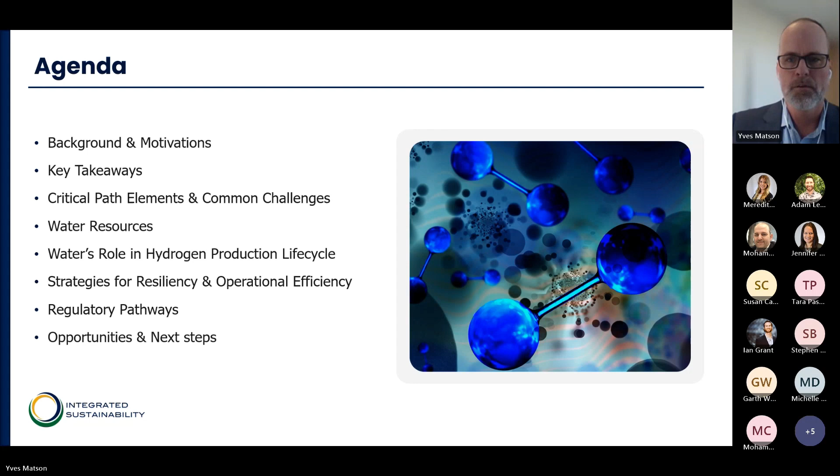This slide is here - if anyone in the room doesn't believe that hydrogen is going to be part of the mix, I'd be surprised. The question is, how big is hydrogen going to be? How fast is it going to come? We all believe in this room that you either decarbonize before you burn it or you decarbonize after you burn it, and hydrogen will play a role in the former.

What will be the barriers to hydrogen projects in Canada moving forward is the big question. Obviously, financing is in the room and regulatory considerations are in the room, but we also believe water is in the room in terms of what will cause different projects to be more competitive, different projects to get more pushback as they move through their cycles, and also which projects potentially get public pushback in terms of their footprint and what their benefits are.

I'm flashing these key takeaways here to kind of frame the webinar. I'll be displaying this at the end as well. The key takeaway is water is a trickier critical path element than a lot of the projects we've been interacting with believe.

Most of the hydrogen projects I've chatted with say, well, we'll deal with that when we get to FEED, we'll do process optimization when we get to FEED. Our opinion is that it should be in FEED. Before you go to the regulator, before you get that final investment decision wrapped up, water needs to be something that is squared away. This is true of a lot of industrial projects, not just hydrogen, but certainly in the oil and gas sector and the mining sector - water is now a very, very critical path.

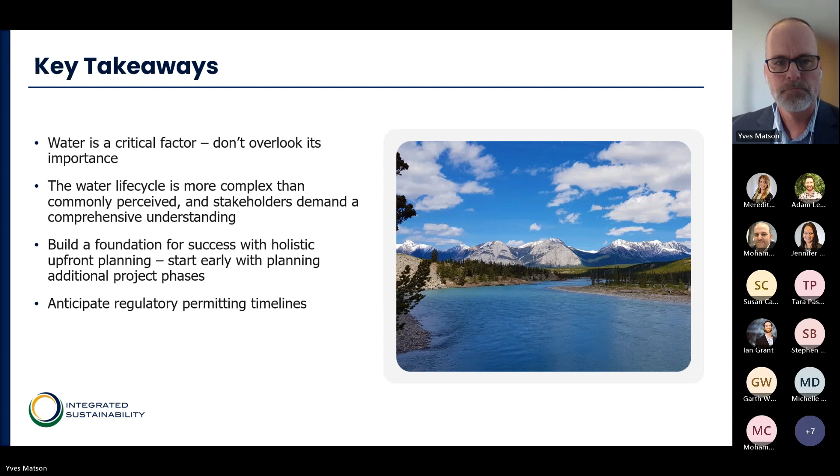So these are the 5 buckets that we really want to speak to today. Water sourcing is going to be something you're probably already thinking about - yes, I do have water nearby, or I've got an ocean nearby, or whatever the case is. You're thinking, my vendor has said I need X amount of water at X spec to go into my process, and that's certainly true. There are some options around water treatment for purity - certainly it's probably a reverse osmosis or RO discussion. But RO is itself a little complex in terms of what we call reject water.

So not all the water you put into the front comes into your process. How many passes through the RO do you push that reject water? What kind of wastewater does it generate in the back end?

Water cooling strategies is a bucket here that I think a lot of people don't pay much attention to in the early process development stage of hydrogen projects. At least that's what I've found. So the water cooling strategies are definitely not at the forefront.

But they consume a lot more water than the process. And so can we make those other less potable, less high quality waters work? The wastewater management side is also somewhat passed over.

If you have ample disposal for an RO reject or a blowdown water from your cooling towers, then you're probably in a good position. But if you don't, because geologically you are on the shield, or you don't have access to disposal because the aquifers are already over pressured by, say, oil and gas activities, then you'll have to come up with other options to deal with it.

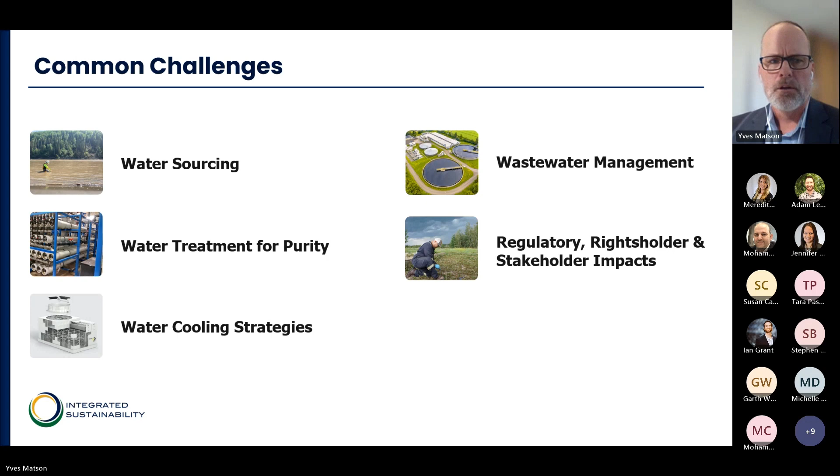The surface water use in Canada is not equal in terms of its geography. There are places in Canada, denoted by the red, where water is already very stressed. In Alberta, for instance, there are a lot of closed basins where no new licenses are being permitted.

There is the ability to buy those licenses. The challenge is, how close are they to your operations? How available are they? What volume do they have? How reliable are they? So even if you have a license, licenses can get shut down if there is a drought condition.

And you guys are going to have these facilities here for 20, 25, maybe 35 years. And inside those decades, there will be drought conditions. So having understood that, hey, I've got water nearby, is kind of step A. Step B is what happens if that gets turned off? How do I come up with plan B and maybe even plan C?

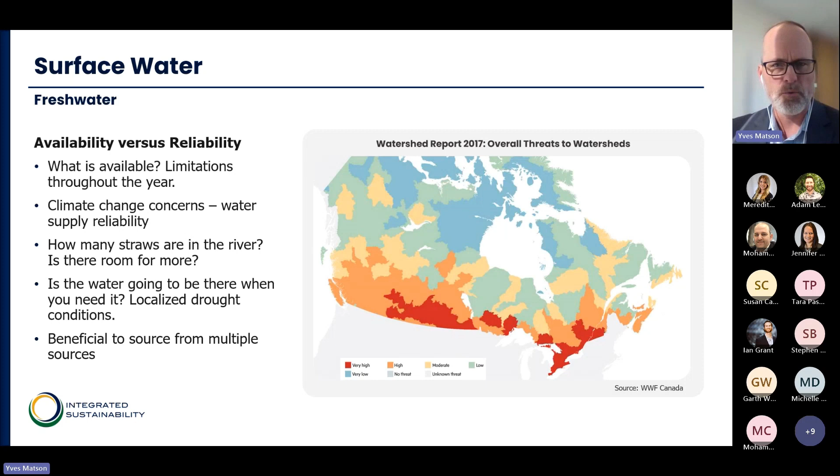And can I reach into alternate sources in times of need? And what are those? And how can I store them? And what volume are they at?

So one of the things that we have recommended to clients in a host of different industries is, what is your storage need? So you might have ample surface water during a portion of the year, but if the freshet falls off and those water resources fall off with it, or in a drought condition, it's only available during a certain portion of the year.

Surface storage may be a way to buffer those shortages. Building large reservoirs is an understood and well-established process that many different industries pursue. Hydrogen will likely need to have this as somewhat of a backup. And it can also potentially play into some of the cooling strategies, although it depends on what kind of water you're using and putting into there.

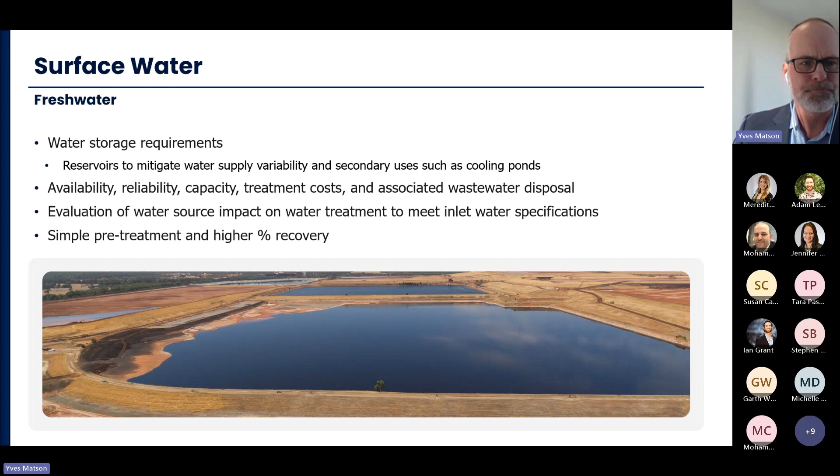The North Saskatchewan is a good case study, probably for a few of the projects in the room here, because there are a lot of steam methane reformation projects progressing in the industrial heartland. Some new studies have found more water in that basin, and it is deemed that there is sufficient water for a project or two projects.

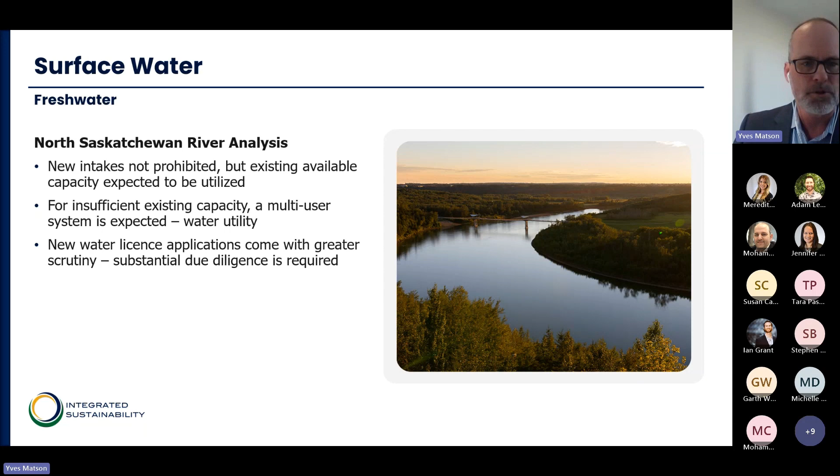The question is, there's about 4 or 5 trying to progress. And so is there room for 4 or 5 projects? That's a big question. Probably not. And certainly which project moves forward will probably be one that uses less water and has less pushback in that respect. This is the hydrological curve of the North Saskatchewan.

So this is that peak and ebb that I talked about that may require that storage capacity to get through drought conditions and or much lower flow periods.

One thing that the North Sask will very likely require is analysis of alternative sources. So there are lots of municipal effluents. There's lots of other places for stuff like saline groundwater to enter into the equation. And before they allow a big new straw and huge withdrawals, they will want that analysis done. Is that feasible or not?

It's not to say that it will be absolutely required. Quite often in instances, you can demonstrate that it's just not feasible to do that, and that's accepted, but you will have to do that analysis.

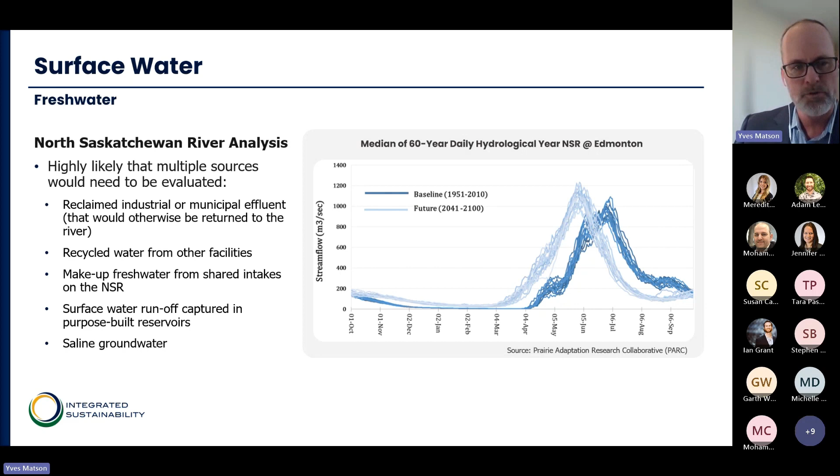The other side of it is there is very likely to be a multi-user aspect to that resource. So you won't be able to simply say, well, my project needs a new straw in the river and I need this much water. You'll have to band together in a utility intake on that river.

We also get questions about seawater from our customers, predominantly in the Maritimes of Canada. They would like to know, what's the impact? There's obviously abundant seawater for their project ad infinitum, so what's the impact of seawater on use?

The answer is it's very doable, but it adds a lot of cost, as you might expect. A lot of the projects are saying, can I use seawater for cooling requirements only? And the answer is yes, but it does add cost.

So by far the cheapest is surface potable water at scale. It's where that's not available, or the socioeconomic, social feedback, or pushback from regulators and stakeholders pushes projects to look for alternatives to freshwater and potentially bring in seawater.

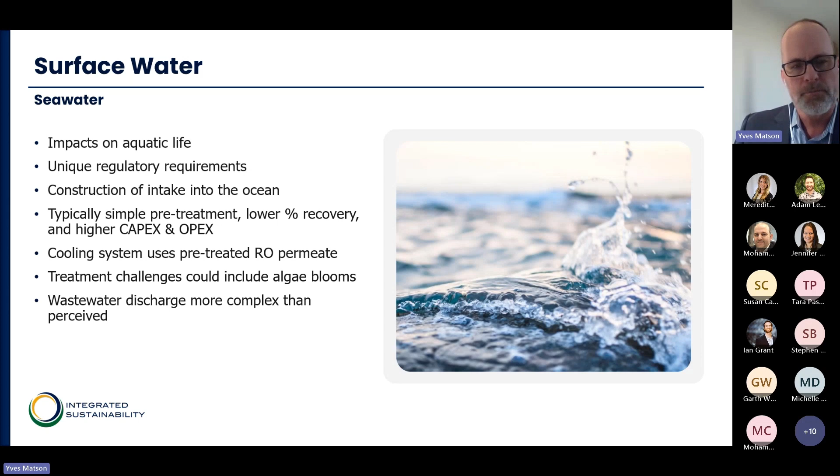There are issues in terms of biologicals and sometimes algae blooms. These are things other desalination projects have encountered around the world. But the good news is it's very well understood.

Groundwater is another question. There are strained groundwater aquifers, and there are groundwater aquifers that have high volumes available. The reaction to using fresh groundwater is pretty similar to the reaction to using fresh surface water. It's a precious resource that's being used for agriculture in cities and towns.

Saline groundwater is another question, very similar to seawater. It varies enormously in salinity depending on how deep it is and the aquifers. It can range from slightly saline, 10,000 TDS, all the way up to extremely salty, 3, 4, 5 times more salty than seawater even. But the management of it is very similar.

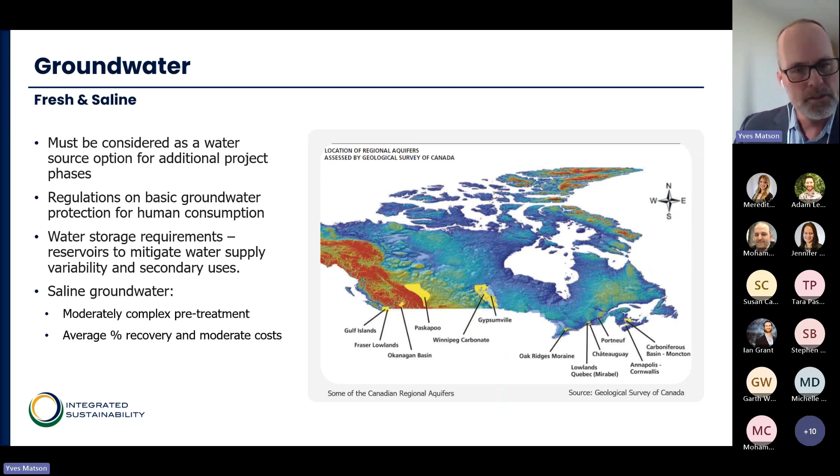So the kinds of materials required, the complexity of treatment - it is unlikely that you would want to use this for your ultra-demineralized pure water feedstock for your process, but quite likely that you might turn to it for the much higher volumes needed for cooling.

I spoke a bit about effluent before. Integrated actually has some experience moving, for instance, pulp and paper effluent - millions and millions of cubic meters per year of effluent getting discharged back into a river that's considered engineered water, which could be moved to a hydrogen project and used quite feasibly with a little bit of pre-treatment for things like biologicals.

One of the issues in the room when using something like industrial effluent is that it's very likely that the plant will have shutdowns or turnarounds to do maintenance. So what is the risk mitigation around that? They may have an emergency shutdown if something goes wrong in terms of part of their process. So storing some water to buffer those is probably very likely - alternative sources that you can kick in if and when that happens.

Certainly you try and manage this so that, best case, they do it during the freshet and there's more surface water available.

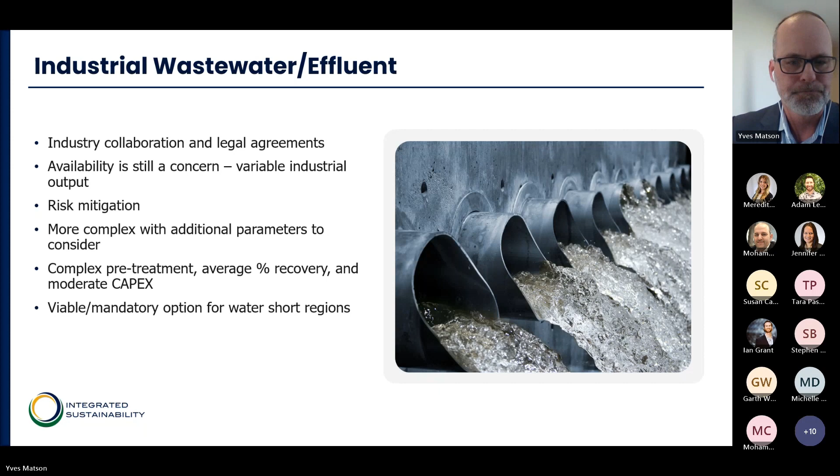One theme we're seeing is that projects making use of existing infrastructure, existing licenses for water, certainly seem to have a competitive advantage in this space.

So one example is one in Newfoundland that is based very close to a pulp and paper mill that is no longer operational, and it has a large water license that can be appropriated. It has a large holding pond that can be used for that buffering I talked about.

So our lens is these projects do have a clear advantage in terms of understanding their water landscape, and they've inherited that essentially from the previous project.

What we would counsel is get to as close to that as you can in terms of planning. So while these customers have that infrastructure already in ground and the permits already in hand, you can move substantially closer to this scenario than most projects we're seeing right now in terms of water, which they kind of wave the hand and say, we'll figure that out later in detail.

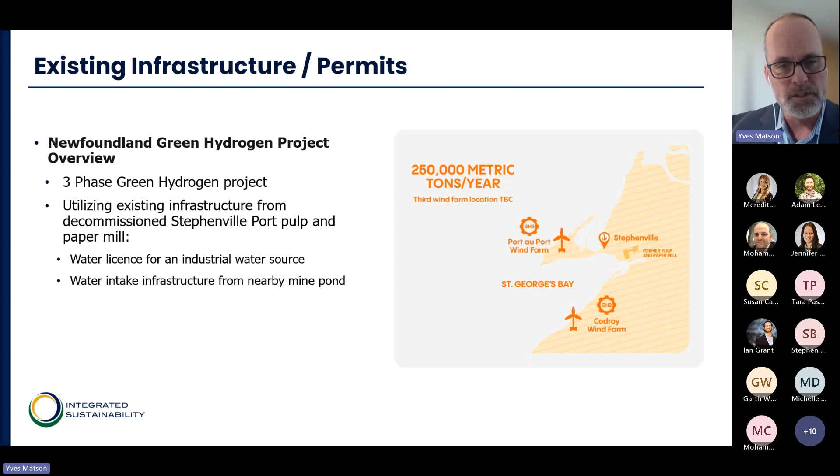For relatively small dollars, you can move the project to a point where it is nearly as well understood from a cost perspective, from an infrastructure perspective, from a permitting and stakeholder perspective, as these already fairly well established water infrastructure requirements for these projects.

Regulatory is something I'll return to again on the facility side, but in terms of water, there is a lot of due diligence required, not just from the perspective of environmental impact and basin impact studies, but also from that stakeholder angle. Managing stakeholder concerns is really inside this, because there will be periods of consultation.

And if you drop a giant water number on them, and by giant it doesn't need to be in the 20 to 30 million cubes range, depending on where you are, there's already extreme sensitivity to water withdrawals. The oil and gas and to a lesser extent mining industries have faced this for a long time.

So when you put the notices out and the stakeholder or rights holder feedback period emerges, you want to make sure you've addressed this holistically, not just this is how much I'm going to take, but this is what my wastewater is going to look like, and here's what I'm going to do with it as well.

I think part of this is the next phase approach too. A lot of projects are going to start with purely surface water, potable surface water, and then potentially in phase 2, as they plan to ramp up into higher and higher production, that's where a lot of stakeholder sensitivity comes around as well. Your current phase is doable, but you're probably going to double your production as time goes by.

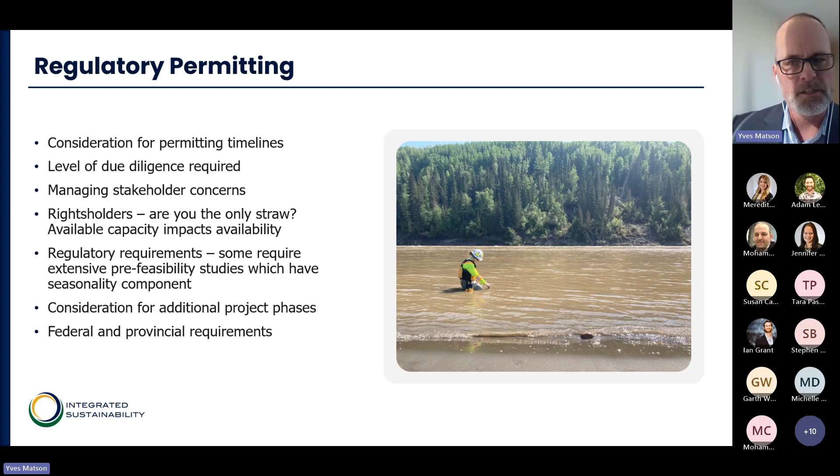So there's a regulatory Gordian knot, as you might expect with projects, especially in Canada. But whatever jurisdiction you're in, you will find yourself in need of a very good regulatory roadmap and a clear sense of the timelines, because some of these things require a year's worth of environmental studies to determine impacts. This is something we've experienced in depth in the oil and gas industry, for instance.

The water demand - I think this slide is really here to speak to the cooling side of it. When your vendor says I need X amount, let's say 4.5 liters per kilogram of hydrogen, or I need 9 or 10 liters per kilogram of hydrogen over in electrolysis, obviously you're going to put your hand up and say, well, mine's not quite that, mine's different, mine's over here or over there. And that's fine, those can vary depending on the technology.

What we also want to speak to is a representative number on the cooling side. Evaporative cooling is definitely the most cost-effective way to keep your processes within their temperature bands. But interestingly, the vendor of that gear, that's really not part of their wheelhouse. They will say you need this amount of water at this spec going in, and you need to keep your process at this temperature.

And that's really the job of an EPC or systems integrator, whatever you want to call it, to do the balance of plant. They will take that spec and put in the best, most effective, most efficient cooling towers, or whatever technology is chosen, to achieve that. That's where the lion's share of water is going to get used. There is the possibility of using air cooled, but it has its own challenges, certainly with respect to CapEx.

So this slide is to say that the 4.5 or the 9 going in is not the full story of what you're pulling out of that lake or that river, because of the RO reject.

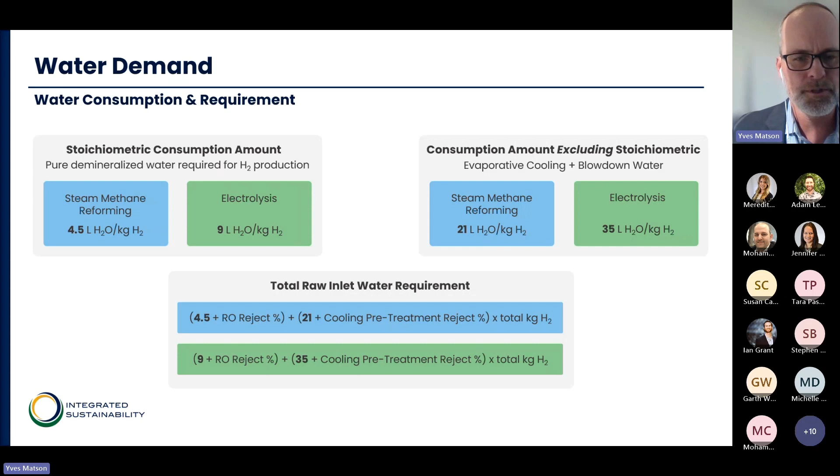This is a pretty standard production process that probably doesn't contain any real surprises for anyone. It reiterates those numbers. But this liquid disposal includes a brine concentrate coming out of the reverse osmosis, as well as liquid waste coming out of pre-treatment. You can see there's blowdown water, and there's a liquid disposal requirement that various jurisdictions will easily deal with, while others will have challenges and need to reduce those volumes.

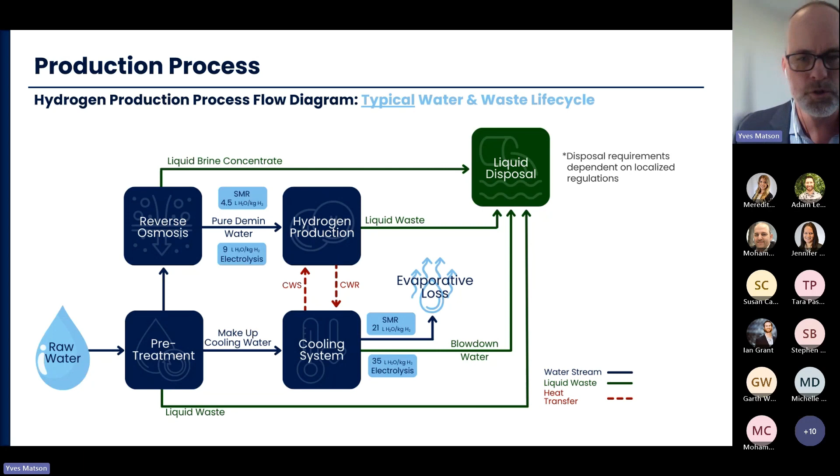When we come to an industrial water use situation, we're always trying to figure out how to optimize it. Sometimes this is phase 2 optimization, but there are new technologies out there that will lower your cooling requirements, or hybrid cooling between liquid and air cooling, or companies that will install glycol loops to pull heat out of a system for Rankine cycles to generate electricity. So there are options out there, but most of the time they add cost, and that's been the big challenge.

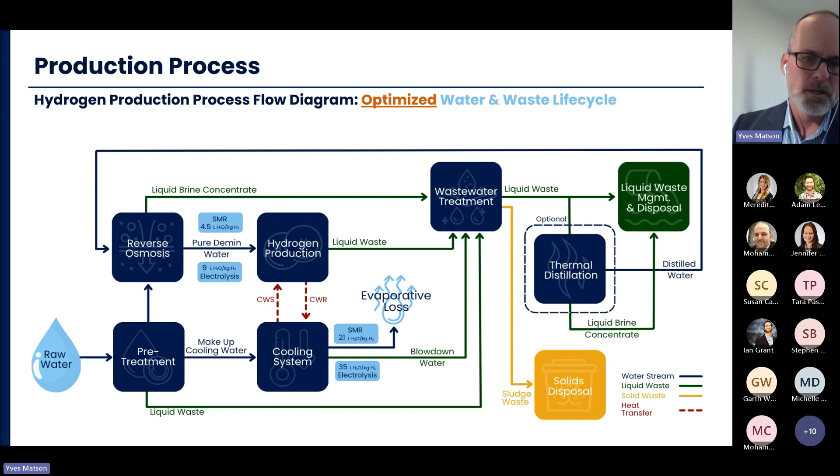You won't go to your EPC and say give me an expensive option here and destroy my economics. You'll say give me the most cost-effective solution. But that cost-effective solution comes sometimes with water challenges. We have some technologies, which I'll speak to on another slide, that help produce more desalinated or distilled water and reduce the amount of liquid waste that has to be dealt with. Sometimes there's also unforeseen sludge coming out of these processes that needs to be accounted for as well.

So when we look at treatment options for hydrogen studies, it's a very holistic picture that needs to be analyzed, and a lot of cost-benefit needs to be traded off in terms of risks, costs, and geographies, including geologies. Believe it or not, you think you're a petrochem facility at surface, but that wastewater management is certainly an issue. It's a very holistic look at water that you really don't want to leave till later, because it may include surprises that increase costs markedly.

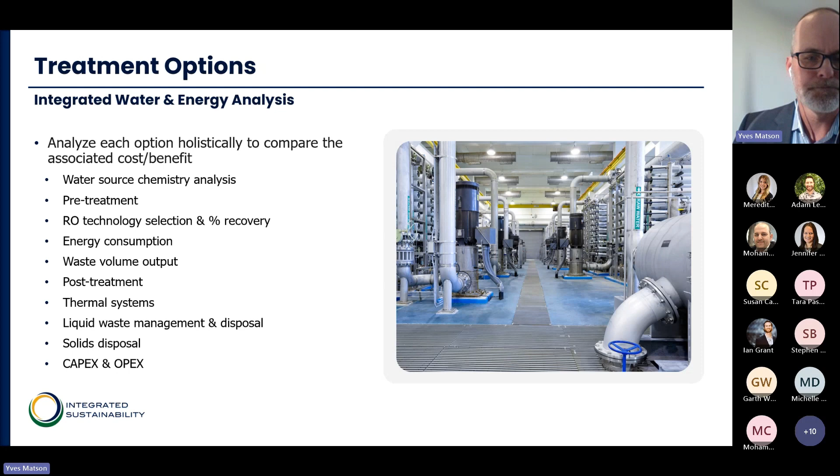So it's those technologies I mentioned earlier, I'll speak to briefly, and we can certainly speak to you individually if any of these are of real interest. Thermal systems - certainly the oil and gas space has had a mountain of brine water to deal with, and sometimes distilling that with waste heat is an option for them, depending on chemistries and so on. Heat exchangers, again, I spoke to this - there are some companies doing heat exchangers to make electricity and benefiting from that.

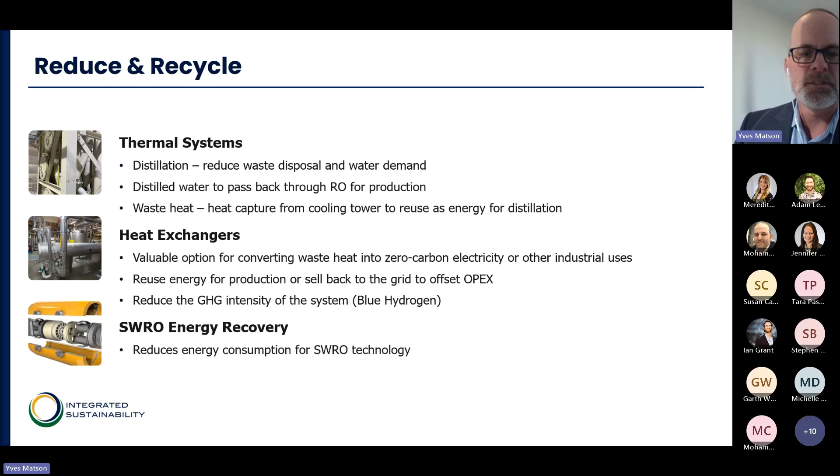Could your project generate zero carbon electricity as a benefit? And then on the RO side, there are pressure recovery technologies to get - so you're going to be spending electricity to pump water through membranes at quite high pressures, and when that cycle ends, quite often that pressure is lost as the cycle resets. Well, there are technologies to save that pressure and lower your energy costs.

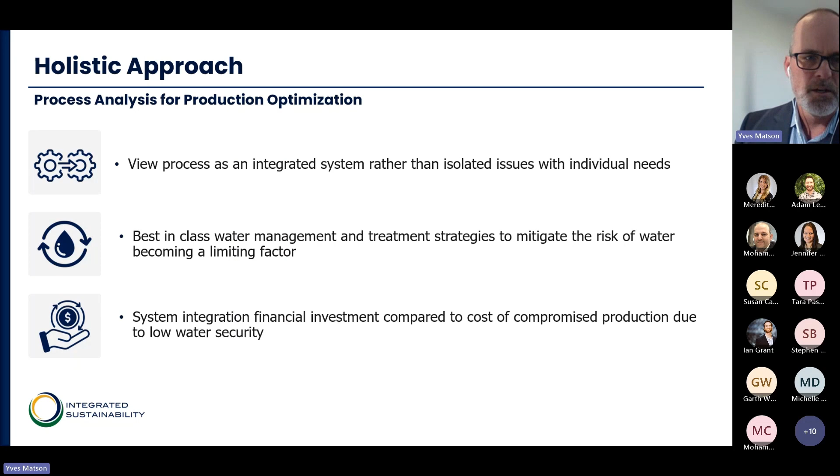In terms of the plant, the regulatory strategy is going to be fairly straightforward. Our view is that the regulators will look more favorably. They don't want political or stakeholder backlash as much as you do, or as much as a provincial or federal politician does.

They are looking for plants that use less, that are less burden, have smaller footprints, all those kinds of things. Certainly that's the case in other industries, and we see no reason why hydrogen wouldn't.

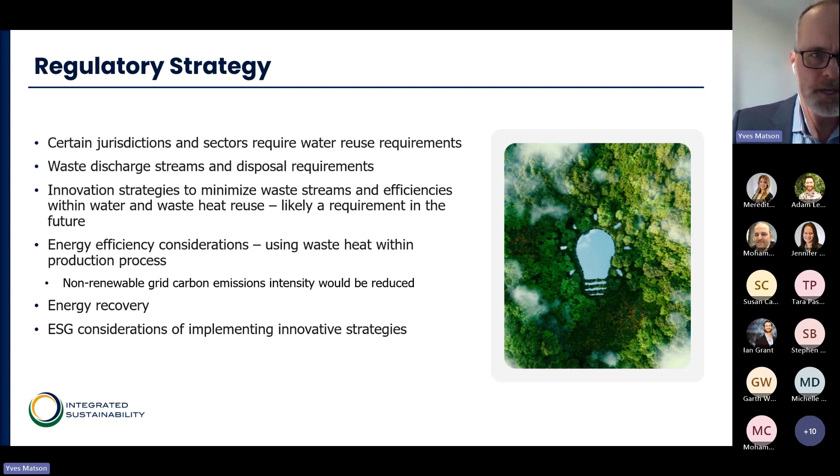And another elephant in the room for certain jurisdictions, for instance in Alberta, is the SAGD world eventually had to use non-potable sources for new licenses. So it was allowed to use fresh water for many years as the industry spooled up, but eventually new licenses had to use non-potable sources, aka saline sources, or it wasn't going to get licensed for use. So that may be a precedent that's been set and may occur in this space as well down the line. Certainly probably not at the start, but certainly a possibility down the line.

So I'm back to those key takeaways before I introduce our panel. Our lens is that this is a critical path factor, and it is something that should be thought of in the FEED aspect of project development. It's relatively low cost to move through these and have a much better understanding. And that much better understanding and much better scoping is gold in the stakeholder engagement portion of the process later on. But I think it's also critical when you're talking to the investors.

Investors are increasingly getting very versed in climate change risks. The SEC is coming out with guidelines where publicly traded companies have to analyze the risk of climate change in terms of their companies. So you can bet that large scale investors that are looking at these are going to have an eye on this. And so long before you think you're going to have to answer those questions, you'll be asked uncomfortable ones, and the last thing you want to say is, I don't know, or we will figure that out later on.

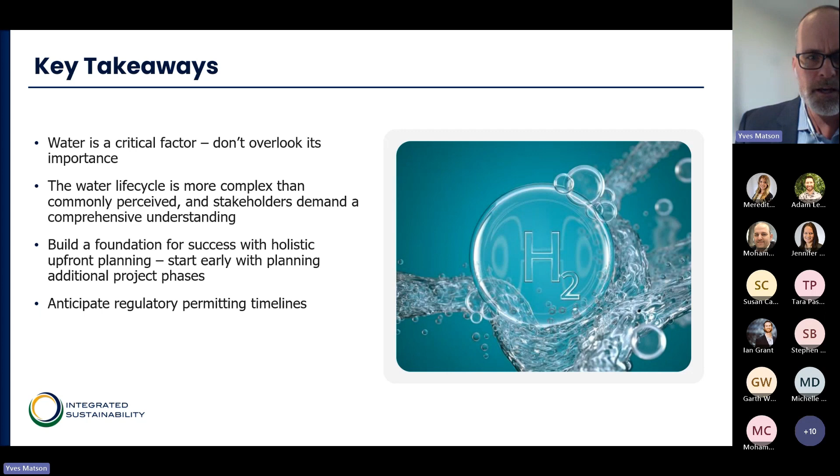So for the low cost it takes to figure these out and get class 5 or class 4 estimates on what things cost and what the OPEX looks like and how you're going to manage the intakes and outtakes, small dollars equal a very competent answer when risks to the project over the 20, 30 years for your water supply, one of your critical feedstocks, are already addressed. So with that, I will end my presentation here, and I will introduce our panel.

Jennifer Katurikis is our VP of Sustainability, Science and Consulting. So she has overall responsibility for the consulting side of this. And when customers say, where can I get my water? The consultants answer that. And how do I get permission to use this? And all those kinds of initial questions in terms of water resources, her team would answer in collaboration with Ian Grant, who is our water resources specialist. So he really looks at hydrogeology and hydrology, and he answers the tough questions about where the water is located, how much is it, and what's the process for validating that.

And Mohammed Awa is our reverse osmosis expert, our water treatment expert. So he has had extensive experience with desalination plants, massive desalination plants in the Middle East. He really brings the right scale to the table. And he's also done process development for other hydrogen projects as well. So with that, I will turn the mic over to Adam Leese, who has been our curator for the questions that have come in, and he will ask the panel our questions, and we'll go from there.